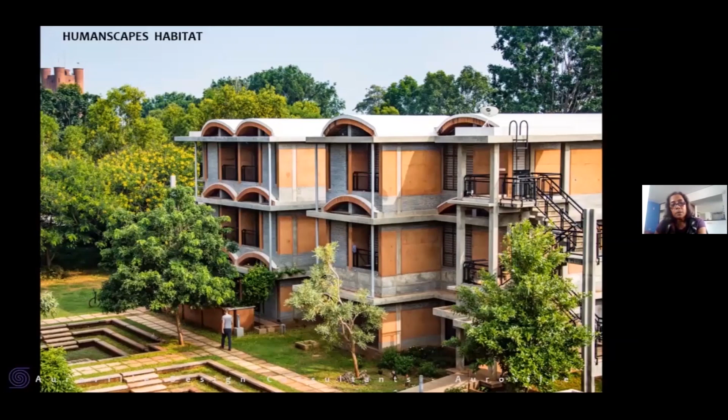I'm going to talk about 7 different aspects that we tackled. One of the first things we did was put together a group of experts from across the country to set benchmarks for each of these 7 sectors, to define what we would try to achieve through this project, what standards are set per the national building codes, and how we could do it better by being more appropriate to the context.

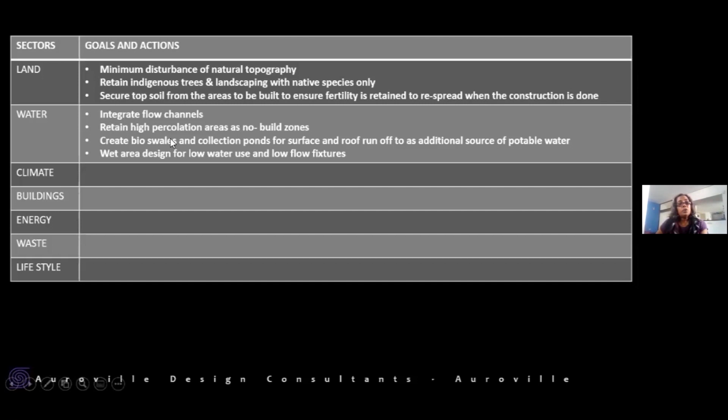The first 2 aspects were land and water. For land, when the site was identified and handed over for this project, we mapped it and decided on minimum disturbance to natural topography, retaining indigenous trees and landscaping with native species only. We secured topsoil from areas to be built on to ensure fertility is retained, to respread once construction is done. We integrated flow channels, retained high percolation areas as no-build zones, and created bioswales and collection ponds for surface runoff and other things.

Why did we do this? So you see the site. Tamil Nadu has a tendency to have periodic failure of rainfall. Most areas of Tamil Nadu are not fed with perennial rivers or even seasonal rivers.

How do we actually take care of water supply? We are doing it either through groundwater or pipe water from reservoirs which are far away. But traditionally in Tamil Nadu, most towns and villages had passive strategies for potable water. We have been looking at the vernacular solutions that were there, which predate fossil fuel electrical energy.

Learning from these solutions, one of the first things that we did was map the site, look at the flow channels, because flow channels and topography are how the earth has been carved over hundreds of years with the natural flow of water, wind, and sun. When you map it and work with it, you actually have the least resistance and minimal disasters.

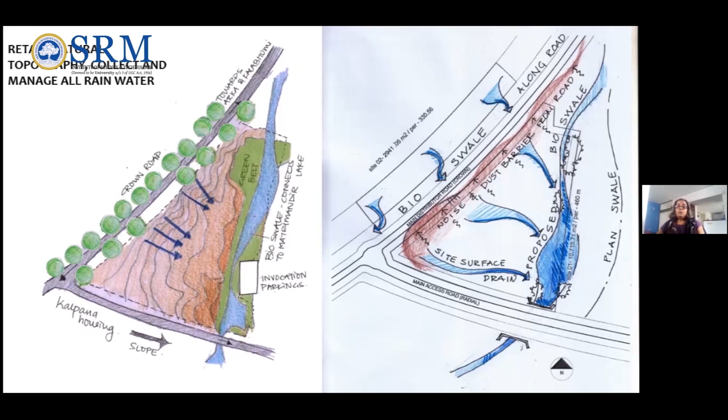So once we knew the slopes of the site, we proposed bioswales to capture the rainwater, which you can see here, planted with indigenous species that hold the soil, including the topsoil, which was very carefully stacked throughout the construction so that the biodiversity and microorganisms in the topsoil do not die. It's respread so that the ground cover takes over.

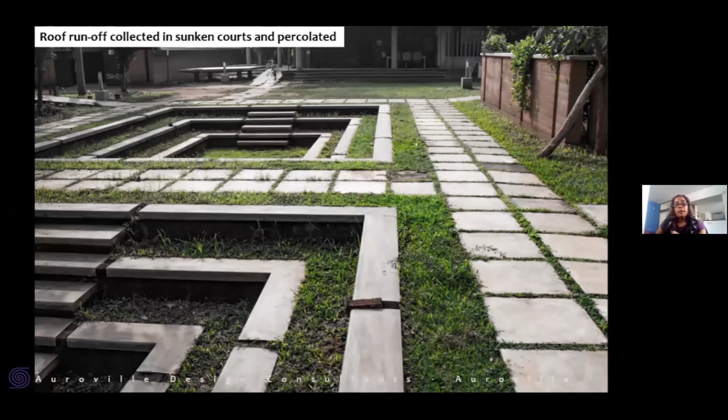At one point, between the ground cover, the shrubs and trees, and collecting of the rainwater, you actually saturate the soil enough to have shallow wells from which you can draw water for drinking. It's also helpful that the buildings themselves have all the roof water channeled and carefully guided through a system of drains and collections to ponds or sunken courts, and then percolated also into the ground.

Basically, where this project is in Tamil Nadu, in Auroville, we get about 1.20 to 1.50 meters of rainfall on average. Of course, there are years where it's only 65, 70 centimeters. By making sure that every drop of water that falls on the site is collected, channeled, stored, and percolated, using a passive strategy of creating a sponge effect, we're able to tap into this harvested rainwater to create a secondary source of potable water, thereby reducing our need to exploit groundwater.

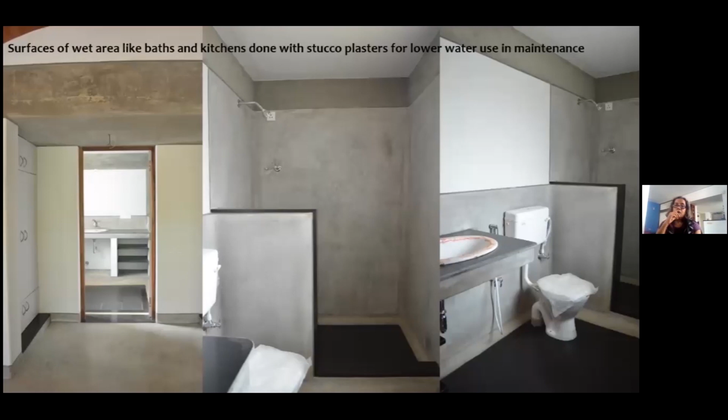We went one step further. Now, that was the rainwater situation. We went one step further by saying we'll cut down on the water use itself. At every aspect, from mining to processing to retail to purchase, till the building material is on site, and how the building material is finally used on site, there is a water audit, and if you do it, you'll see the budget of water is quite high.

Some of the things we cannot directly impact because we are not in control of the cement industry. We can reduce the quantity of cement use, we can reduce the amount of steel use, but we cannot actually intervene in the water use in cement manufacturing. So what we try to do is at least reduce the local footprint.

Besides harvesting rainwater, in all the wet areas, whether it's kitchens, bathrooms, or toilets, we try not to use ceramic tiles and instead use only natural stone and stucco plaster. The advantage is that ceramic tiles require excessive water to keep clean because of the shiny industrial finish, which always tends to look dirty earlier, and the grout joints and cleaning require much more water and sometimes even certain chemicals to keep them clean.

With stucco plaster, also called IPS, Indian Patent Stone, once it's waxed, traditionally these surfaces are much easier to keep clean because you just have to wipe them dry.

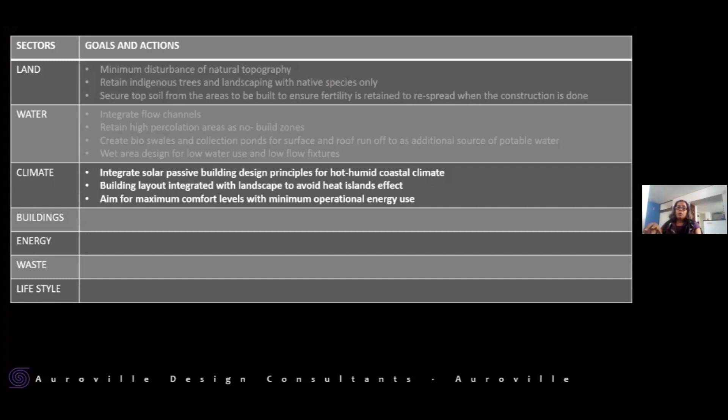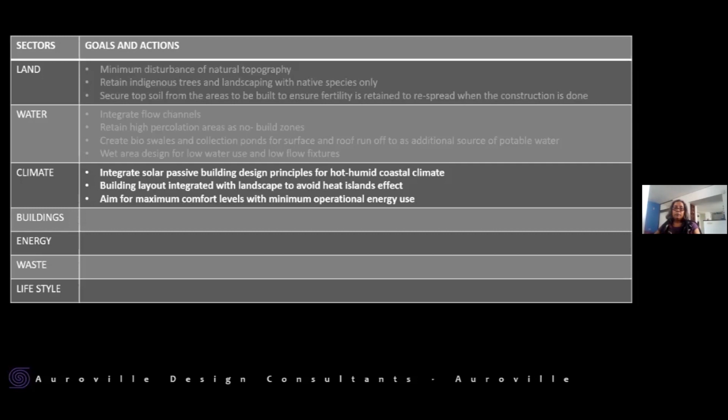Now going to the next aspect, which is the climate. For climate, we try for three different things: integrate solar passive design principles for hot, humid climate; the building layout, site planning, and how building volumes are integrated with the landscape is done to avoid heat island effects, which we'll come to as I continue; and aim for maximum periods of comfort level so that we reduce operational energy use.

Now, what's happening is in coastal Tamil Nadu, like many places in peninsular India, you have a hot, humid climate because we're not very far from the sea, which means that even though the temperature does not go as high as in composite climates, because of high humidity, you tend to feel the heat much more.

So when it's 38 degrees and 60% humidity, it's as uncomfortable as 46, 47 degrees, whether it's in Madhya Pradesh or in Haryana or Rajasthan, because the amount of humidity causes metabolic discomfort in the body.

So what we try to do is look at several aspects we can utilize from the challenges of the climate in the building design. One of the things is the sun moves from east to west. The morning sun, the air temperature is cooler, so it's not that disturbing, but by 3 o'clock in the afternoon the air temperature is higher. Direct sunlight from the west is actually increasing the heat intake in the building. So we reduce the east and west facade of a building, increasing the north and south facade instead, which is also the facade that has minimum direct sun.

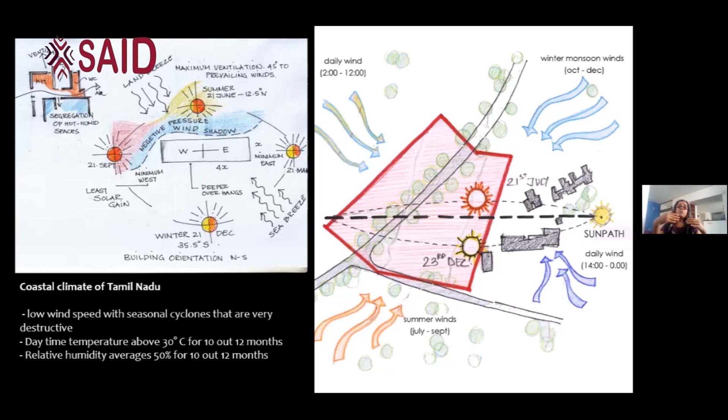But of course the sun also moves north and south because the planet has a tilt. In the summer, the sun goes towards the northern hemisphere to the Tropic of Cancer, and towards the winter it goes to the Tropic of Capricorn. So depending on the angle of the sun, 35.5 degrees, it goes to the south in winter, but the air temperature is lower so we're not so concerned. But in the summer, when it goes 12.5 degrees north, the air temperature is higher. So we work with shading devices in such a way that you take care of the sun angles.

Another thing we do is look at the predominant breeze directions and wind speeds. Based on that there are two aspects we try to cover: location of various types of functions within the residential units, bedrooms for night breeze which is a land breeze, daytime rooms which is at the sea breeze level, and creating a wind shadow so that you increase the wind speeds when the summer is hot and humid—it's actually the lowest wind speed here—while also protecting the buildings from cyclonic storms.

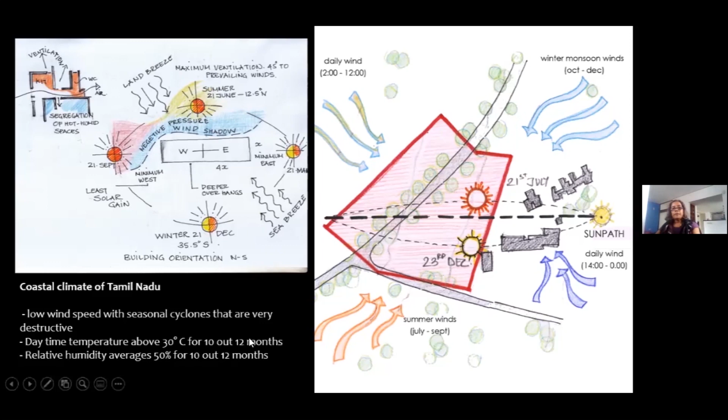And then playing with the type of opening, location of opening, size of opening to ensure maximum ventilation. Because in hot, humid climates, it's only when there's breeze that the sweat dries on the body, cooling the surface of the body and lowering the temperature to provide comfort.

So what you see here is phase 1 and 2 of the project, and it's still continuing. The buildings are all north-south facing, this is north, this is south, with very little facade on the east and west, as you can see. Most of the trees that you see on the image were already on the land and have been retained. And we've created wind shadows with the courtyards and pockets within the building to increase the wind speed.

Another thing we have done is the facades which are west or southwest facing, we have shaded them and provided certain kinds of indigenous species of trees that are semi-deciduous or non-deciduous, so that the ground temperature around the building does not increase and reflect radiative heat during the summer, while the facades on the south and southwest also have long shading devices so that the building facades don't heat up and radiate the heat out during the post sunset.

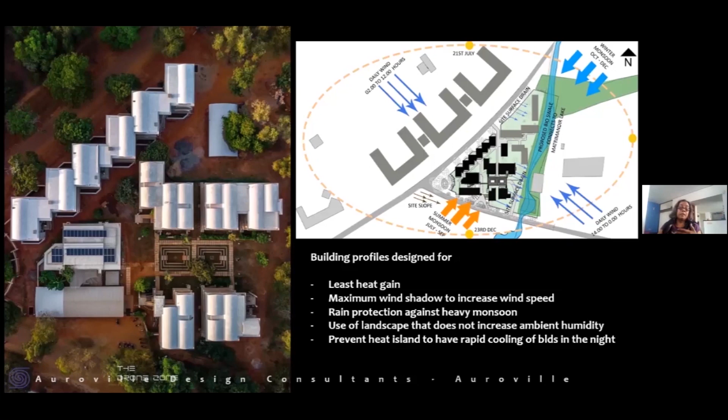This way, by avoiding heat island effect, in the evenings you can have the windows open, avoiding the need for air conditioning, because air conditioning is one of the biggest contributors to urban heat island effect. And the more it gets hot outside, the more you want air conditioning inside. The more you have air conditioning inside, the more you have heat thrown outside.

It's like a catch-22. And as you can see here, close up in the middle part, that's where all the roof runoff is being drained and harvested, while on the planted area here is the bioswale that is taking care of surface water harvesting.

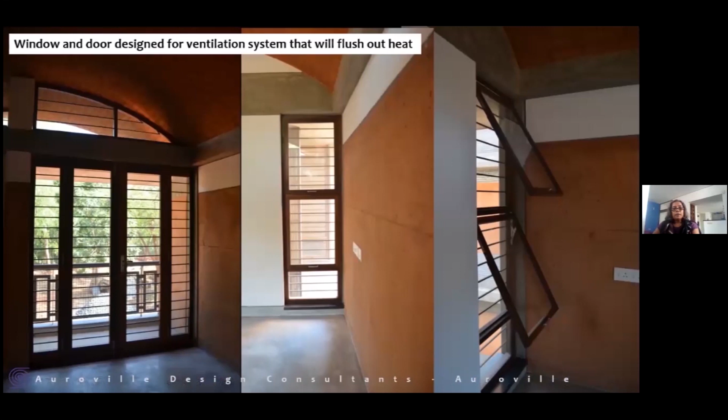The windows and doors, like I told you, are designed and positioned in such a way—even the openings, instead of having just normal openings or sliding ones—they're actually made so that you can modulate the wind flow by increasing the opening on one side or the other.

All of us have learned as architecture students that the windward side, if you have a smaller opening, and the leeward side, if you have a larger opening, you end up creating wind pressure differences that increase the airflow and also increase the velocity of the airflow.

This is what we try to work with, because predominantly in the summer, during the day, you keep the windows closed, trapping the cool air of the night. So from 8:30 in the morning till almost 4:30 in the evening, the windows are closed, curtained off, trapping it. But in the evening, when the sea breeze starts, you open up the windows in the corners and the top part of the building, and it starts to flush out the radiated heat from the walls, which due to time lag is starting to seep into the building.

By flushing out the heat, you're creating pockets of cool air that absorb the heat from the walls and the ceiling and flush it out. This lowers the temperature inside the building, making it equivalent to the temperature outside, creating the cool night air effect outside and the cooler building effect inside, preventing the need for air conditioning.

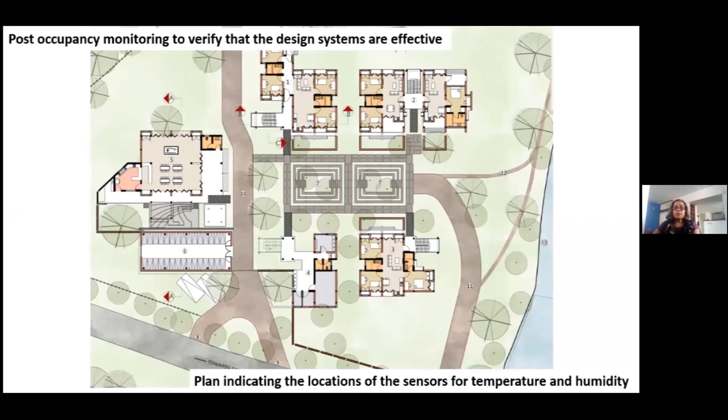So once phase 1 was ready, we put up sensors. We put up several sensors. In this drawing you can see several sensors. We put up sensors inside the building to look at temperature, humidity, and the lux of the natural lighting.

We put up sensors on the surface of the walls so that we could monitor the time lag and heat intake between the western side of the wall, which is the critical side. We put up sensors in the ceiling and outside of the roof to also monitor how much was the heat gain from the surface of the roof, which is the biggest heat gain in a building.

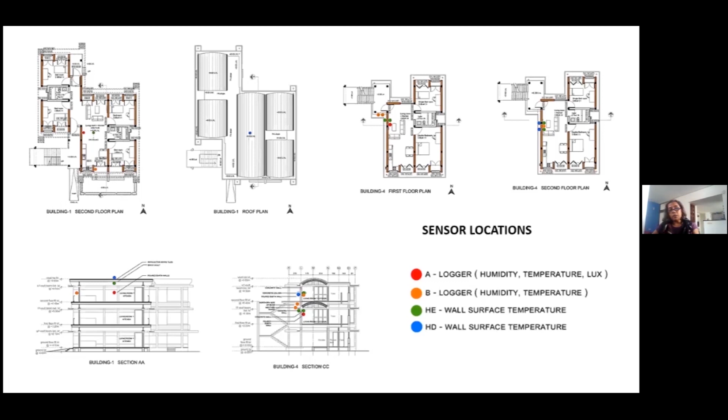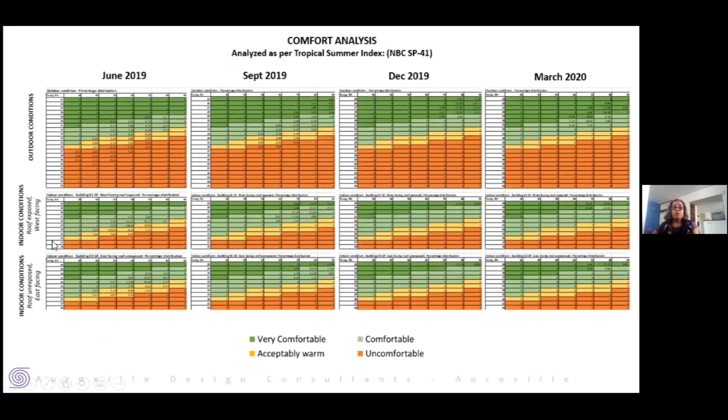And we had hour-to-hour temperature logging for 13 months. That means 2 summers, 1 monsoon. Based on this, we worked out the outdoor and indoor conditions of all the different apartments with adaptive comfort level.

So basically in June, which is the hot, humid part, when the monsoon has hit the west coast—but for us in Tamil Nadu, we're on the leeward side, so we don't have a monsoon, but the humidity increases without lower temperature. You can see here that in June, 50% of the outdoor conditions was always within the comfort zone.

So you had only less than a quarter of the time, which was peak sunlight hours, maybe between 11 and 3, that outdoor conditions fell outside the comfort zone, which means 37 to 34 degrees with 30 to 90% relative humidity—which, of course, anybody will tell you, you don't go and stand outside then.

And you keep looking—September, you had between 39 to 45% of the time with actually very comfortable to comfortable conditions outdoor. December, of course, and March as well.

But then when you look at the indoor conditions in the same months, almost 60% of the time indoor conditions were comfortable. That means 31 to 35 degrees centigrade, which means that with a fan, you can actually live quite comfortably if you are also wearing clothes appropriate to this climate. By December and March, the comfort level is very comfortable or comfortable.

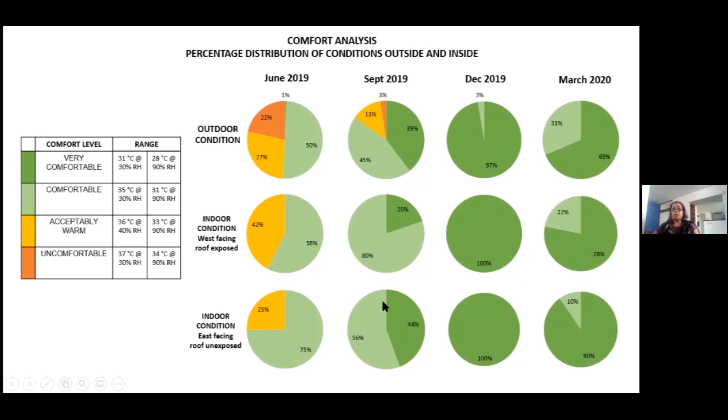Going to the next part—that was about climatic comfort, which is how you can actually achieve it with proper site planning, working with building volumes, balance of built and unbuilt spaces, and shading devices.

I'm going to come to the next aspect we worked on: the buildings themselves. How do we achieve efficiency? Now, efficiency can be achieved—I'm talking about building efficiency, not efficiency of energy or water. That means how do you design so that the functional layout of the building is such that most of the spaces that are built are livable spaces, with very little circulation or negative spaces.

Second is how do you design the shape of the building? The shape of the building is given by walls, floors, and roof.

Now, how do you design it in such a way that you have minimum amount of walls, floors, and roof while you have maximum volume that is usable? Why do we want to minimize the surface area?

Because by minimizing surface area, you're reducing the amount of building material needed. For sustainability, we can talk about low embodied energy materials, recycled materials, and other things, but the first step is to reduce your need.

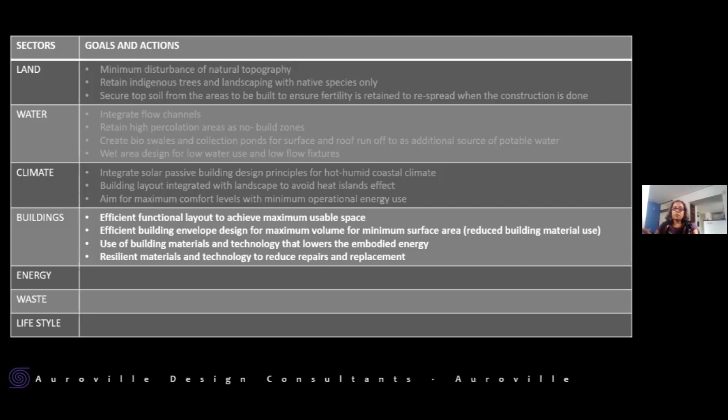Often, when people talk about natural building materials with low embodied energy, they do not take enough concern into also looking at repairs and replacement. Whatever you might be saving in the capital investment part should not be offset during the occupancy stage, where people every few years have to repair and replace stuff, because then through the lifetime cost of the building, you end up actually having invested more in terms of carbon per square meter of the built space.

All the walls of the building are made up of two different materials. One is what we call poured earth concrete. This is a mix of earth stabilized with 5% cement by weight, which means that if I'm using one bag of cement, which is 50 kilos, I can actually have 950 kilos of earth.

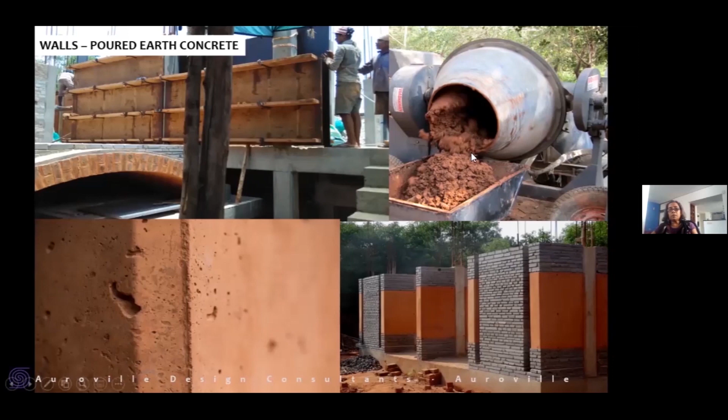It's 5% by weight mixed with construction waste. All these granules that you see are actually debris from construction sites where they break off bits of cement, bricks, and concrete and other things. We buy construction and demolition waste, break them up, grade them, mix them with earth and cement, and we pour it between shutterings, like here.

These are shuttering planks. We pour this earth between the shuttering, vibrate it, and when it's de-shuttered, after 5 hours, you actually get earth walls that are like concrete walls, but made of earth and construction and demolition waste.

One of the advantages of this wall, besides reusing construction demolition waste, is that it can be done with low skill labor and it goes very fast. I mean, you have earth construction using blocks, but when you excavate the earth, sieve it, make blocks, stack it for 3 weeks and only then use it, you need a lot of space.

When you're doing rammed earth, mixing it and ramming it, you still need to have people who are able to monitor the compression aspect. With this one, with the right mix, where you can actually, after a soil test, say how much water, how much cement, all by measurement, you mix it in, and almost everybody knows how to do concrete.

So it's actually, instead of concrete, you're using earth and construction demolition waste with a little bit of cement. The technological aspect remains more or less the same, it's the materials that have changed. So you make a transition from a known skill into an innovative material, almost bridging the gap between conventional and non-conventional construction.

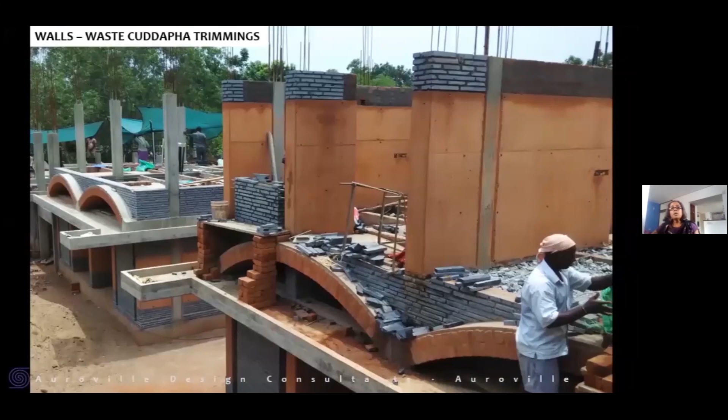The next part that you see here is the lower end of the walls and certain areas which will be damaged by driving rain. We have used Cuddapha trimmings. What happens is that in Renigunta district and Kadapa district in Andhra Pradesh, they mine Kadapa boulders, which is a sedimentary rock, and then they slice it off into slabs, and then they trim off the edges to get a rectilinear shape.

All these trimmings are dumped in farmlands of distressed farmers who are unable to continue farming because of failure of rain. They are not able to pay back loans they have taken, so they actually lease the farmland to the industries that are cutting Kadapa stones for marketing. What we are trying to do is actually get from the factories these waste trimmings and use them directly as a building material.

This way, the factory has a place where it can send off its trimming, and it does not pollute good farmland where it's just piled up and the stone dust is leaching into the soil and killing off the topsoil. One of the good things about it is that when it's done, with the pointing that is done, it's also self-shading and quite durable. You can see the finished walls here, they're light gray, with deep grooves in between which provide minimum shading to the walls.

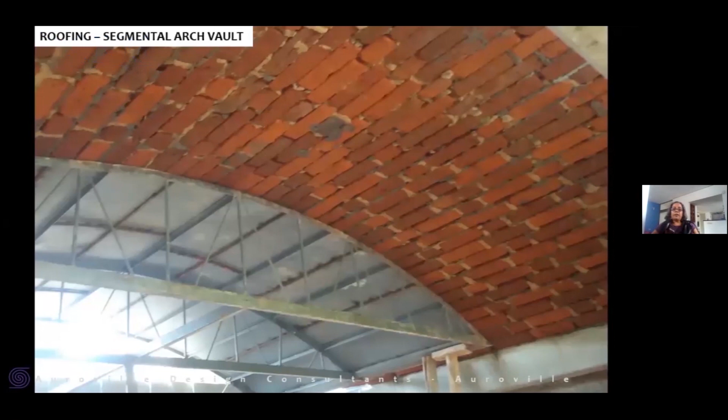Going on to the roofing, you saw in the first photo that we have walls, and we have vaults between floors as ceilings. So between the ground floor and the first floor, it's what we call a segmental arch vault. These are made with local fired bricks, which are extremely porous and brittle. But an advantage of using local fired bricks is that they're very good at sound absorption, because vaults tend to resonate and carry sound. So for audio privacy between apartments, by using these porous fired bricks, we actually deaden the sound.

Using centering, these segmental vaults are done. We have a sliding centering, so every day about 2 meters is done. Then the next morning, the centering is slid and a new set of bricks are laid to continue with the segmental arch vault. This is how the vault looks when it's finished.

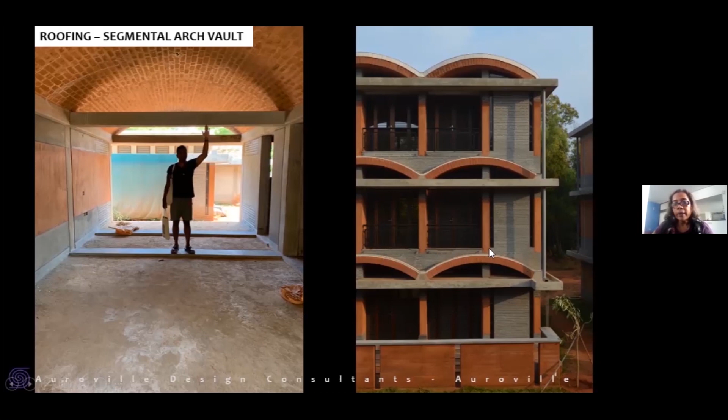So now you have a vault, but you have a floor here. What's happening in these spaces? We come to that. Styrofoam, or as we call it in India, thermocol.

Thermocol is a material extensively used in packing, insulation, and transport. But unfortunately, it's a material that is not only high energy consumption to manufacture, it does not decompose. It breaks down—when you leave a piece of thermocol outside, it crumbles into microparticles, but each particle can last for centuries.

We have a lot of thermocol waste. Every time you take the highway, you'll see thermocol flying around. Go to any river or stream and you'll see bits of thermocol floating. Fishes have thermocol in their stomachs, and we are eating them. There are other mammals and animals which also have thermocol that has gone into their biological systems.

So one of the things we said is, can we address this issue? Because Pondicherry has a large number of assembly factories, all the parts that come in for assembly from different parts of the country and the world come packed in thermocol. And of course, in Auroville, we also receive Amazon packages which also have thermocol.

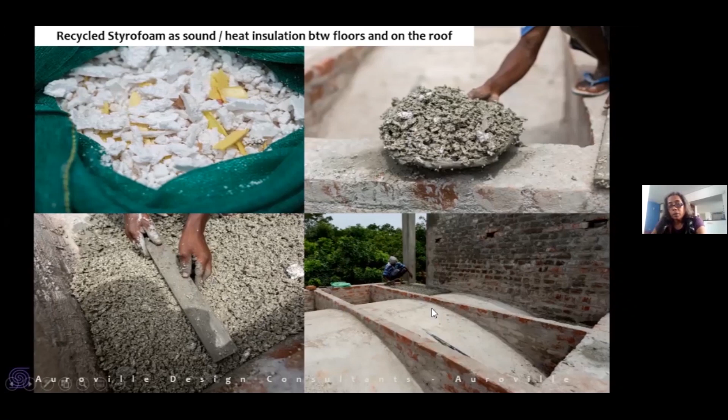We mix it with cement and sand, and use it as infill material. It's lightweight. This way we are actually packing in the thermocol and preventing it from spreading into the landscape. Being lightweight, it can be used as under-the-floor filling, and being a good insulation material, it provides insulation from noise and heat. So finally, you have the floor made of thermocol, which is a form of waste recycling.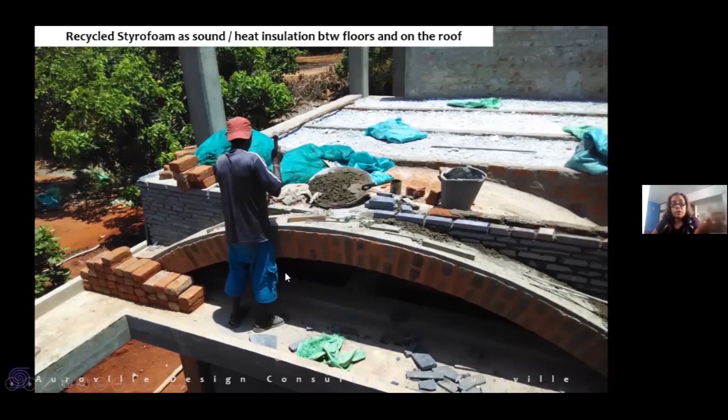We have walls made with trimmings from the Kadapa factory, which is another form of waste recycling. We have poured earth walls which have construction and demolition waste inside. So in a way, the entire envelope of the building has a high amount of recycled materials, plus innovation that has gone into reuse of these recycled materials.

And all the woodwork that we have is also made of recycled wood. It's a bit painful because Pondicherry, a town only 12 kilometers south of Auroville, has beautiful heritage homes, and beautiful homes which are not heritage but are vernacular architecture from the last 200 years. Now, due to rising land costs and land value, a lot of these old homes, which are ground plus one or ground plus two, are being taken down, and new buildings are coming up.

Faceless concrete boxes with cement plaster are coming up. But all these old ceilings with madras roofs, the wooden beams, columns, doors and windows, are actually sold. We have 2 or 3 roads in and out of Pondicherry where you can find a lot of this wood being sold.

So we actually go and buy them, looking at the sizes of the wood and the type available, and design the doors and windows keeping the recycled wood availability in mind. This way, we waste very little wood in reshaping them.

And finally, the ceilings. We talked about heat intake through the roof. Now, heat intake through the roof is managed in 3 different ways. We have the thermocol packing, but then we also have the porous fired bricks in segmental arches. The final layer over is done with 3rd quality ceramic tiles. This acts as a cool roof, reflecting the heat.

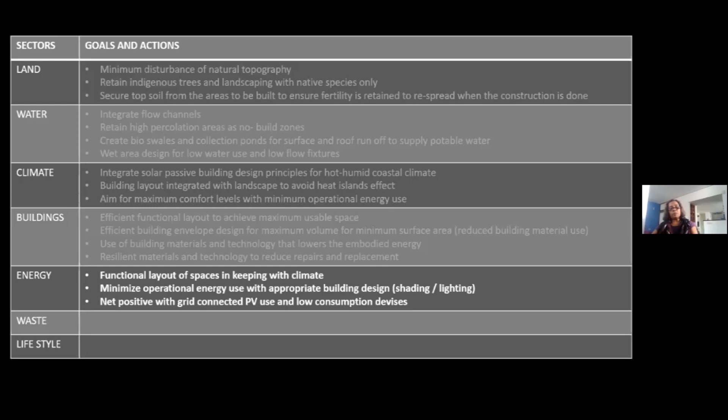You can only do so much with functional space layout and minimizing operational energy, because at one point it does get dark in the night. At one point, the temperature and humidity outside is such that no matter what you do, it still gets hot and humid inside, and you would need energy to run a fan. So this is what we have done.

We have tried to size, position, and shape all apertures so that they are modulated for daylight. And I'm not talking about maximum daylight condition - that's actually the worst you can achieve, because in hot, humid climates large openings mean glare, and not just maximum light but also maximum heat. So you really need to work with your windows and doors to get good daylight with proper lux while keeping out the glare.

Glare is basically a condition that comes with humidity. Humidity causes suspended water molecules, which then reflect sunlight in all directions, creating a painful condition where if you look up, the sky looks gray and the sun looks like a lighter gray in the summer - but it's actually because of all these little spherical water molecules reflecting the sunlight. So when you go to places with low humidity, you get blue skies, but places with high humidity often have a grayish white sky because of that.

So which direction the aperture faces matters for ventilation and light, but also the size and shading of the apertures cuts the glare. Another thing that cuts glare very well is mosquito mesh painted black. When the mosquito mesh is painted black, you cut glare, but you do not impede the visual access to the space outside - you look through the mesh instead of looking at the mesh.

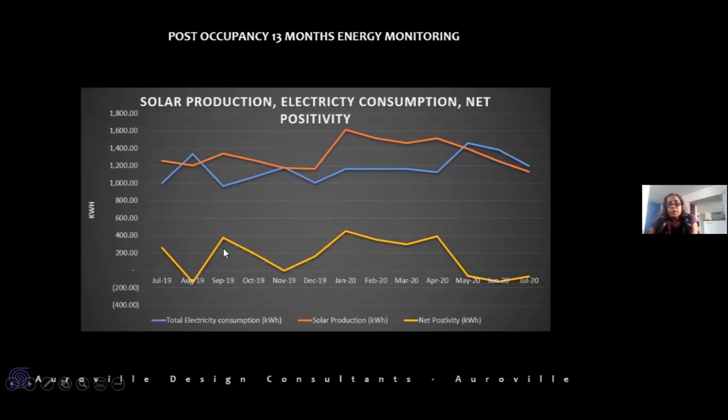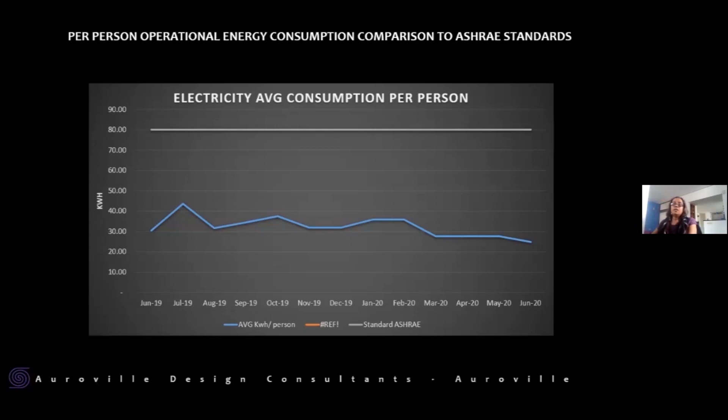If you look at per person consumption of energy, the gray line is the standard ASHRAE line for tropical climates. What we are consuming on average per person is almost less than 50% of the standard. Besides the climatic comfort in the building due to design and materials, by working with people on awareness and capacity building, we've made people conscious about how they can save energy. Using low energy fixtures and bulbs is part of the scheme.

We come now to the next part, waste. Any human settlement takes in resources—water, energy, food, clothing—and gives out waste. It's a kind of cycle: you take in all the resources, and what comes out after you've consumed them is waste.

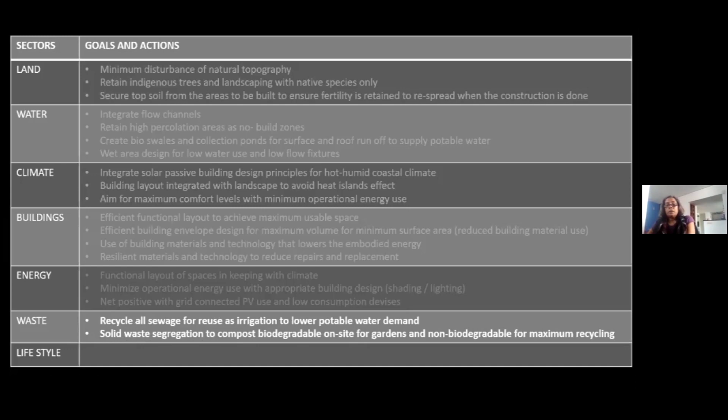Waste can take all kinds of forms. We have sewage, which is bodily waste from toilets, showers, and kitchens, and solid waste, which is food, packaging, and other products from our consumption. Over the last 20 years in Auroville, we've fine-tuned a system called DEWATS, a gravity-based natural recycling system that takes the three different types of sewage: yellow, which is urine, gray, which is all the wash water, and black, which is from the toilet.

It takes all three types of sewage and recycles it in closed tanks through a system of flow rate and tank sizes, allowing anaerobic bacteria—since it's closed, without oxygen—to break down the waste. Then it's filtered and reoxygenated, either using plants or what we call the vortex system, to create ponds from which the water is eventually used for irrigation in the gardens and around the homes.

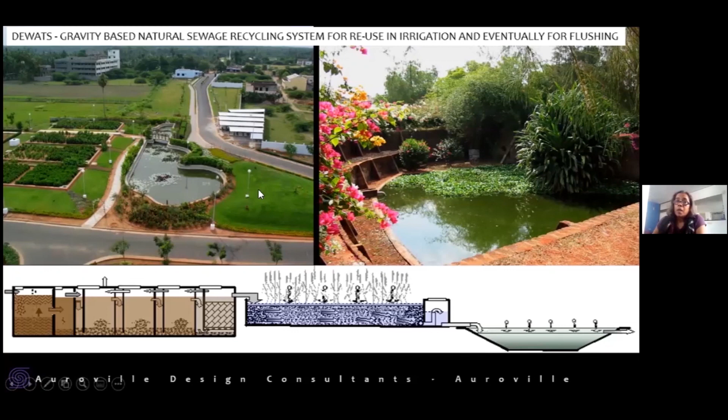Right now, we are not using this water as secondary water for flushing because the system doesn't yet allow total removal of turbidity. When it stands for more than 24 hours in closed tanks, it starts to smell again. But we're aware we need to improve the system so we can reuse the water for flushing, because flush water is almost 35 to 40% of our water consumption in a household.

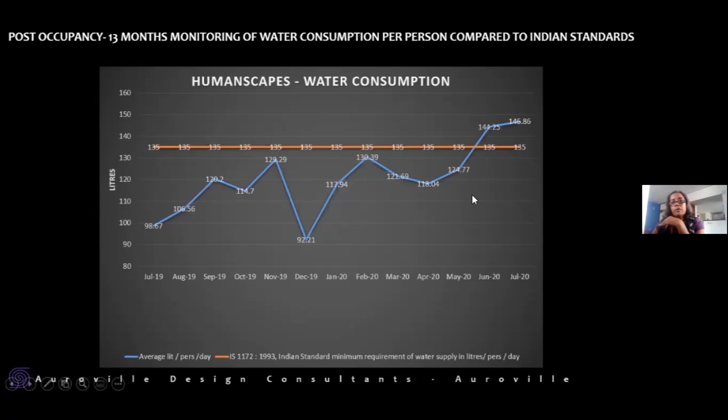When it comes to waste, we have waste segregated in every household. All biodegradable waste is composted on site, and this is a regulation we've put in place that no biodegradable waste leaves the settlement—there'll be composting on site and reuse in the landscape.

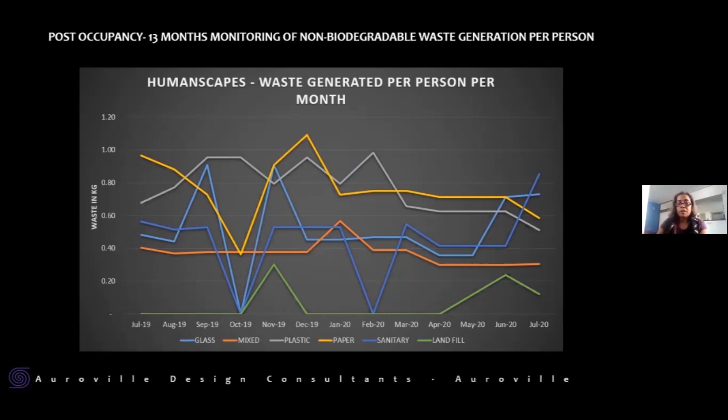Then it keeps going up, and then we do another workshop and it drops, and then it goes up. So what we realize is that changing lifestyle does not happen by just one article, one workshop, or one lecture. You have to do it over a long period of time, because the habit as it is set within us does not change. Enthusiasm changes it for a month, and then we go back to our previous habits.

Finally, I'll come to the last part, which is lifestyle. So all the different aspects, whether it's land planning or site planning, dealing with water, whether it's rainwater, sewage, or roof water, building for climatic comfort, building efficiently and using appropriate building materials, working with lowered energy consumption and generating energy, recycling our sewage, recycling our waste - all this will not have the kind of effect we want unless there's also lifestyle change.

And I think with this past 8 to 10 months of this pandemic, it has come to everybody's notice that lifestyle is one of the things we really need to relook at. With more and more people working out of homes, a lot of economic downturn, we start to look at lifestyle as something which is much more minimal and more responsible, with a lot more sharing.

So we tackled lifestyle in 3 different ways. Climate appropriate lifestyle in terms of clothing, food, and timing of metabolic activity. What does it mean? In most urban India in the last 30 years, the way we clothe ourselves has completely changed. People are wearing ties and jackets in the summer. People are wearing closed leather shoes and boots even when it's hot and humid.

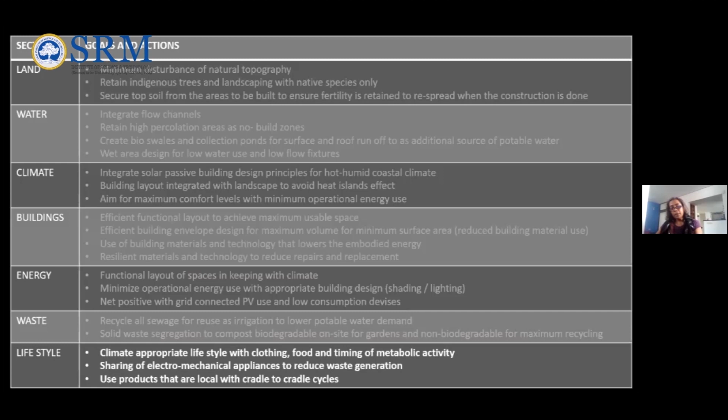And the worst of all is the type of activity we do. I have seen in Delhi people going to the gym in the summer at 4:35 in the afternoon, which is the peak heat time, and having the gym air conditioned at 18 to 20 degrees centigrade because they're all feeling very hot. But anybody would tell you if you want to work out during the peak heat period of the day, of course you're going to feel hot. Everything is organized so that you can disconnect the activity from the actual climate and time of day, so that you have a choice.

But the problem with choice is that soon we may not have a choice. Climate change is real, and the kind of biodiversity loss we're looking at is real. The resources are diminishing by the day. India is today consuming more than 1.5 times its biocapacity. That means no matter what we do, we are not able to produce biologically the amount of resources we're consuming. And over and above, we have gone past peak oil. So at some point, we have to realize that choice is actually a delusional thing produced by the market economy and being fed to us.

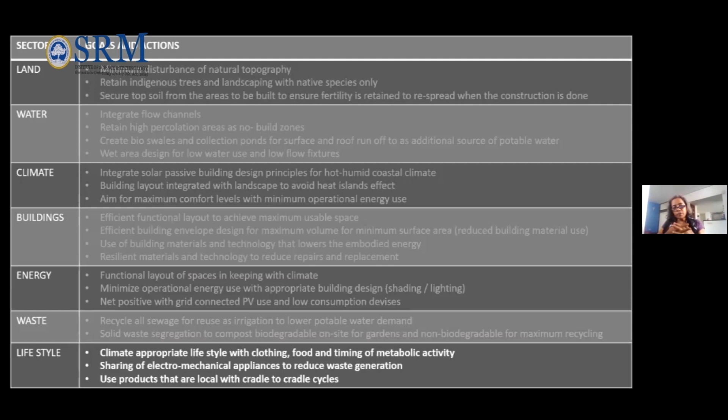The next aspect we looked at was electromechanical appliances. This is something that when we studied it, we realized there's so much duplication in all the households. For example, if you have a blender or mixer in your house, you might use it once or twice a day and it just sits there. Whether you use it or not, within 2.5 to 3 years you have to replace it, because the industrial manufacturing sector can only generate jobs and profit by replacement, not by repair.

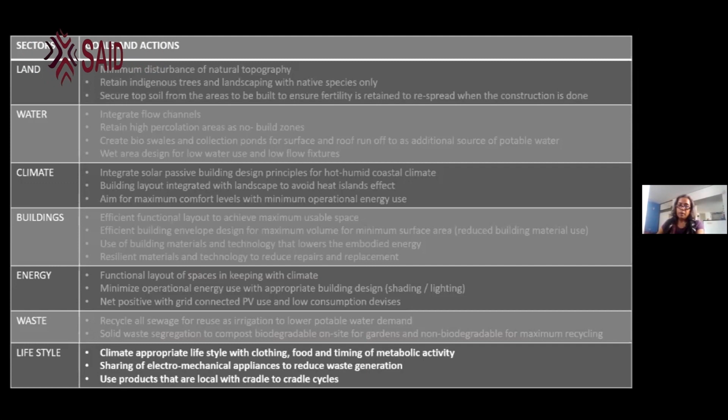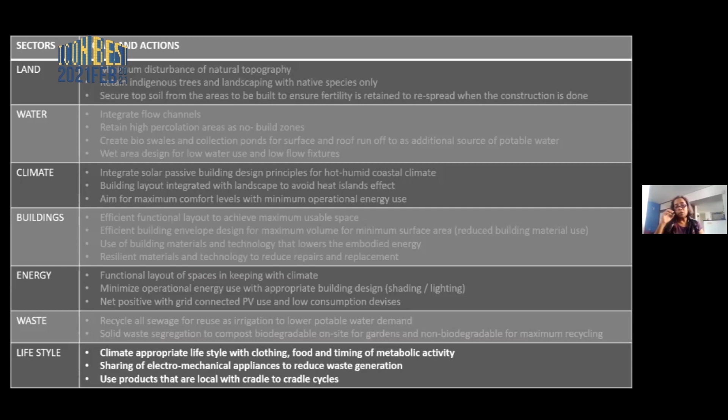If this appliance is shared between a couple of households on the same landing, it will still last 2.5 years, but you buy one instead of four. When you replace that one, you produce much less waste, because for many of these appliances, the energy content that goes into manufacturing is never actually utilized during its life cycle of use.

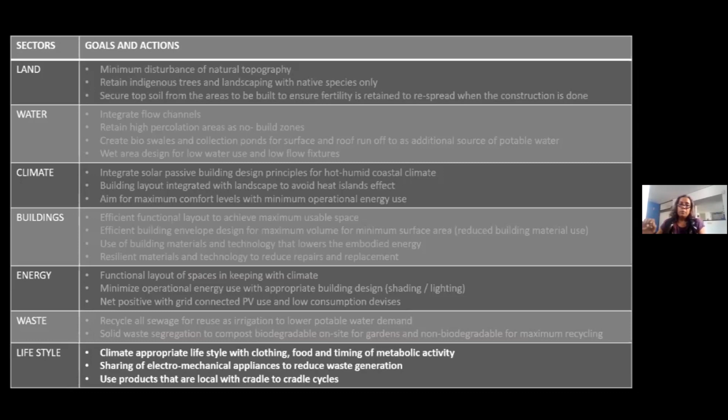And it all goes back into creating more waste, landfills, and pollution in our water system. The last thing is actually doing research and producing information that people can access to find and use local products.

Which are responsible for cradle to cradle cycles. This is the graphic we came up with, which says you have to first develop a geographical and climatic awareness. If you live in a hot, humid climate, be aware it is going to be hot and humid. Try to accept it and live with it rather than fight it and find ways and means to earn an income just to produce mechanical or electrical stuff to fight it.

Second, work out a daily routine in sync with daylight hours so that you reduce operational energy needs. Have work-life balance. Go for appropriate and resilient clothing. Avoid fast fashion. Fast fashion is creating a huge problem in India.

Today, on average, urban Indians below the age of 35 are going through 6 to 8 fashion cycles annually. And the clothing which is discarded and goes into landfills is a huge problem.

I don't know how many of you remember, 3 years ago there was a slow fire in the landfill outside Bombay, creating enormous pollution and discomfort for the people of Bombay. Most of it was actually clothing. We have the same problem in Chennai, same problem in Delhi. A lot of fast fashion is shoddy clothing, bad chemical dyes polluting water streams, and dumping in landfills.